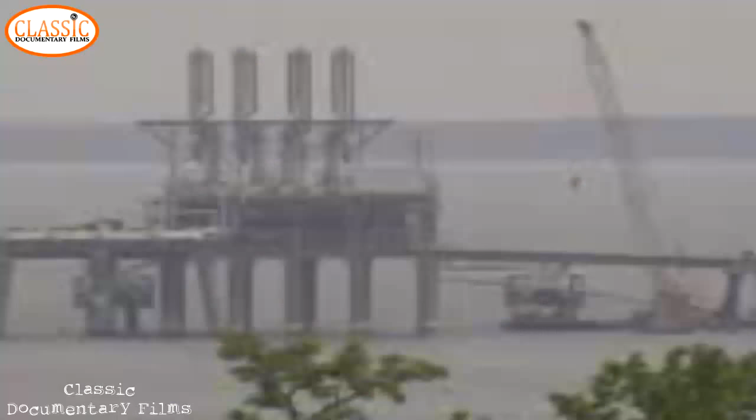Liquefied natural gas, or LNG, has become an increasingly popular energy choice for many nations. Though LNG has enjoyed a relatively safe track record, it can be an extremely dangerous commodity, capable of causing massive fires.

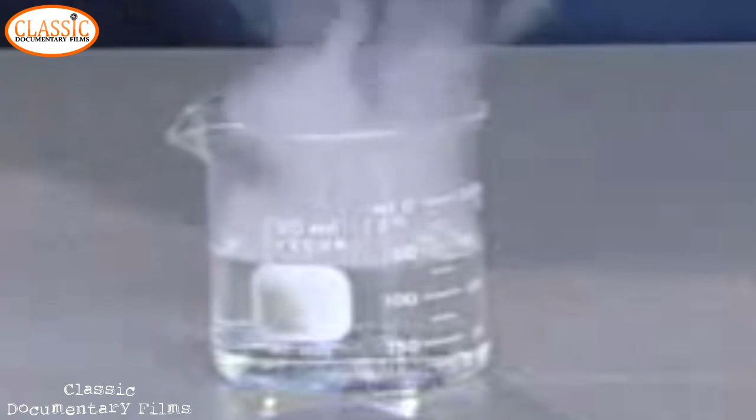LNG is natural gas in a liquid form. When natural gas is cooled to minus 259 degrees Fahrenheit, it becomes a clear, colorless, odorless liquid. By liquefying the natural gas, you reduce its volume by a factor of about 640, making it much smaller in volume and allowing you to store it much more economically. This property of LNG allows for cost-effective transport of massive quantities of natural gas.

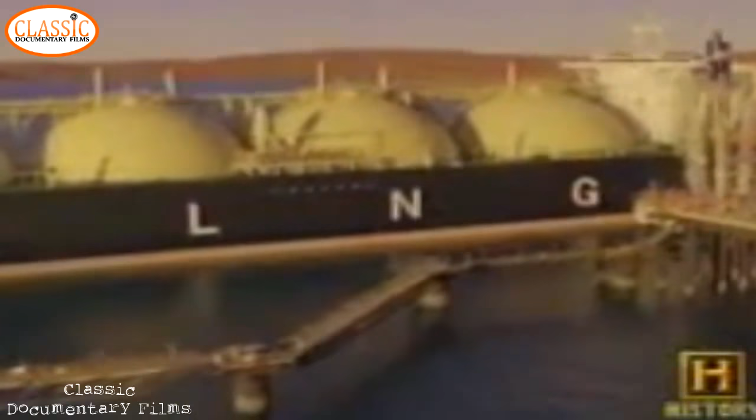Today, more than 150 LNG ocean tankers transport over 110 million metric tons of LNG annually to ports around the world. By 2010, LNG is projected to fulfill 10% of U.S. energy needs.

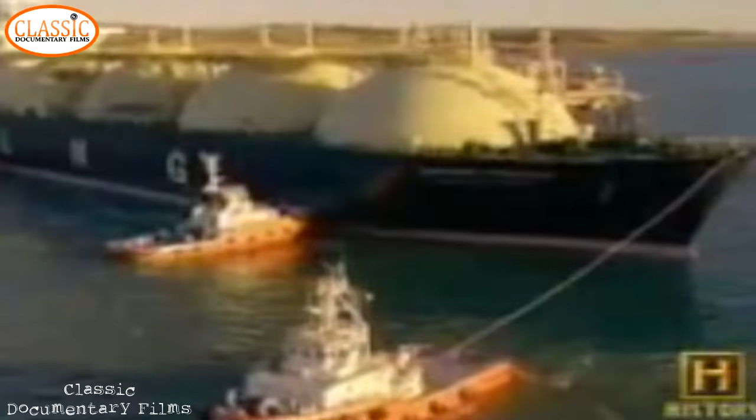There are currently 70 storage facilities called peak shaving plants in North America. They store LNG for peak demands. We also have 5 LNG import terminals and 1 export terminal in the U.S. By 2010, we probably will have 5 or 6 more import terminals.

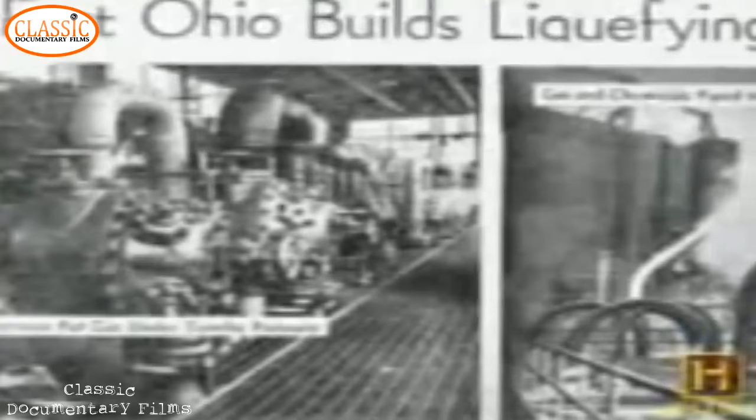The concept of liquefying natural gas dates back to the 19th century. Its practical advantages were, and still are, appealing. 60 years ago, the city of Cleveland built the first commercial LNG facility in the U.S. It was there that the full scope of LNG's deadly potential would be realized.

We're standing here on the epicenter of where the East Ohio Gas Company explosion and fire occurred in 1944, and it's indeed on this very site, on the green grass of what is now Grdina Park, where the 4 enormous liquefaction, regasification, natural gas storage tanks once stood.

On October 20th, 1944, a storage tank at the East Ohio Gas Company failed. And suddenly, at 2:41 p.m. on an otherwise unremarkable fall day, the world ended in the Norwood St. Clair area. Leaking LNG vapor ignited, and the resulting explosion and fire killed 128 people. 79 homes, 2 factories, and 217 cars were destroyed.

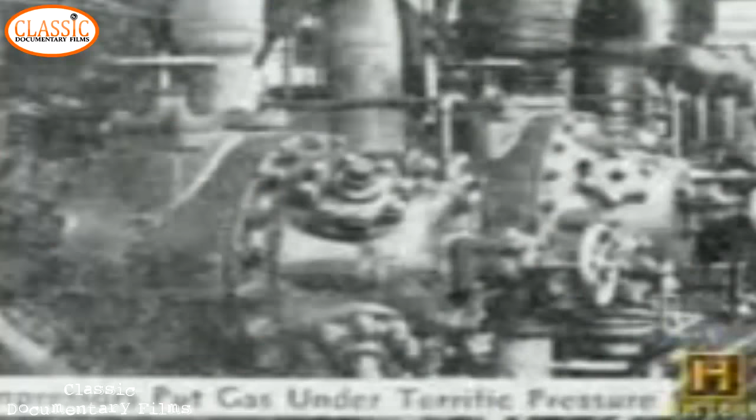The East Ohio Gas Company began building LNG facilities in 1940, as intense wartime manufacturing contributed to repeated natural gas shortages. So what they would do essentially was, when the demand was low, they would take on gaseous natural gas, liquefy it and store it, and when the demand was high, they would then regasify the liquefied natural gas and use it at that time.

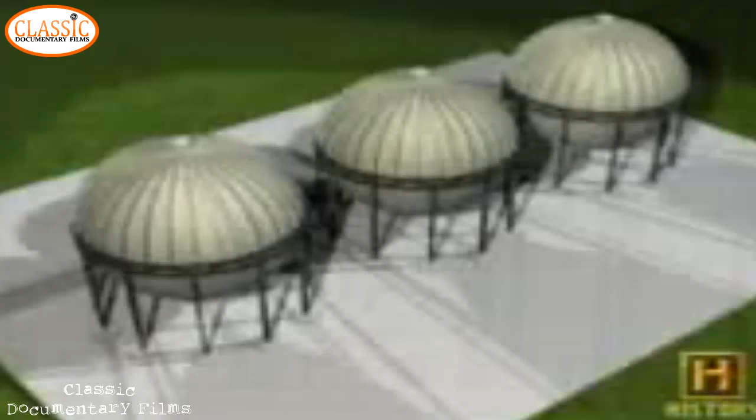3 57-foot-tall liquid natural gas tanks, each capable of storing 50 million cubic feet of LNG, were put into operation by early 1941. Those 3 tanks were of spherical construction, and the support was from vertical columns that connected up to an equatorial beam that went around those spheres.

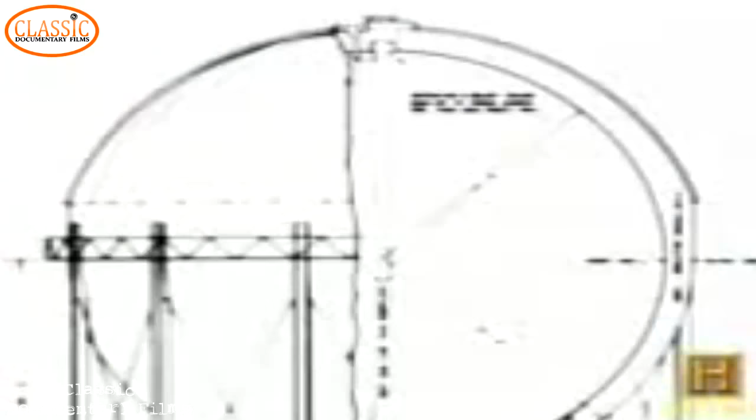That plant operated just fine with those 3 tanks for a couple of years, and the demand increased, and the plant then obtained approval to construct a 4th tank. The number 4 tank held 90 million cubic feet of LNG, double the amount of the previous tanks. It was a cylindrical shape and more stable because it was supported from the base. As with the first 3 tanks, number 4 was constructed using a 3.5% nickel steel alloy.

All of the tanks were built on East Ohio Gas property, situated adjacent to the densely populated Cleveland neighborhood called Norwood. There was no template of experience for people, I think, either at the technical level or the neighborhood level, to have any understanding of the danger that they were inviting in their neighborhood.

At about 2:30 p.m. on October 20th, 1944, several residents of Norwood noticed white, steam-like vapors creeping out from tank number 4. Leaking gas from the tank ignited, causing a massive explosion and fire. Houses 8 blocks away from the tanks instantly began to burn.

When I first saw the fire, and the only time I saw the fire, is when I was turning down, I was running down East 61st Street, turned around and looked back, and I saw this sky full of fire, full of flame, and it was like the sun had come to Earth.

The burning and the fires reached temperatures of 3,000 degrees Fahrenheit. The flames were at their peak probably 2,800 feet in the air.

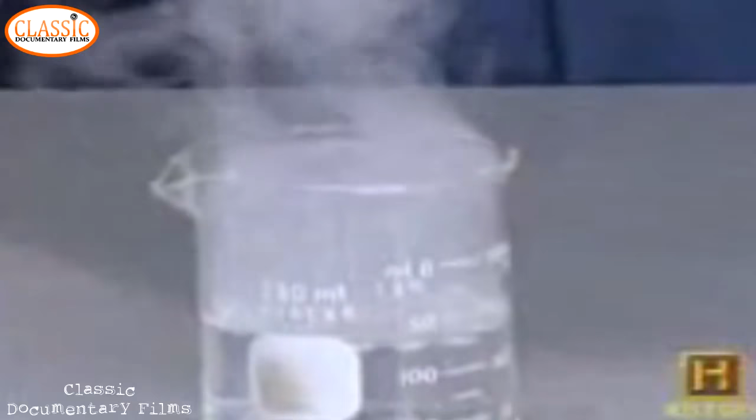If LNG leaks out of its sub-zero container, it will not immediately dissipate. In its liquid form, natural gas is heavier than air, and it will stay close to the ground. The LNG can linger for up to 30 minutes before warming enough to evaporate, ample time for an ignition source to spark an explosion.

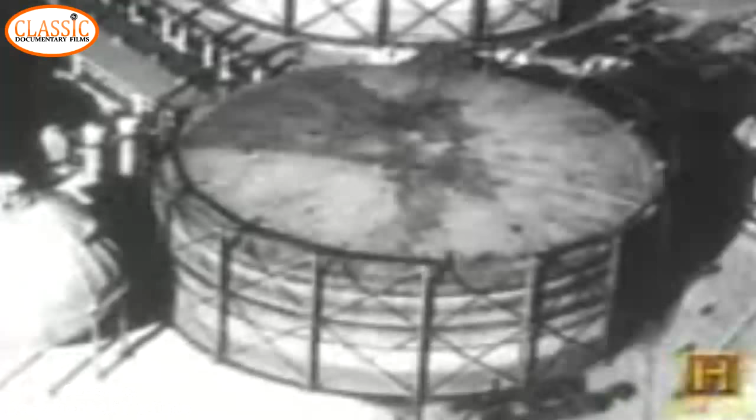The tank in Cleveland contained 90 million cubic feet of LNG, which spread as an invisible vapor cloud into the street and sewer system. Essentially, the neighborhood just before the first initial explosion occurred is best thought of as a sort of a saturated wick. Pilot lights ignited the cloud once it was inside, and houses burned from the inside out.

Firefighters were helpless as the water supply system was decimated by multiple explosions. The fire continued to smolder for three days after the explosion. The spread of the fire was attributed to several causes, but one fatal flaw was to blame for the initial leak in tank number 4.

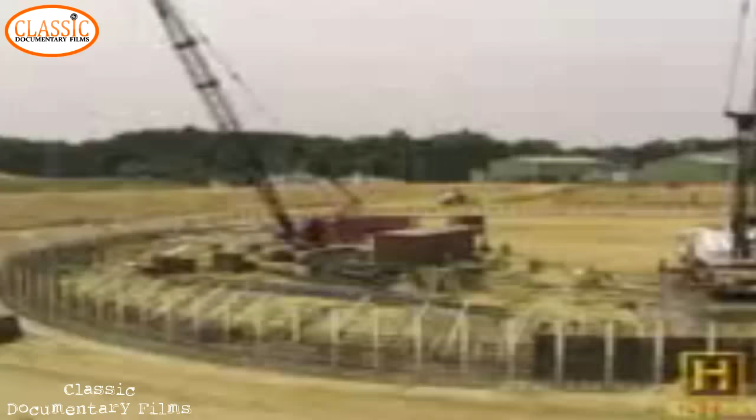The properties of 3.5% nickel steel alloys, when subjected to sub-freezing temperatures, were not thoroughly understood. It was later learned that a higher concentration of nickel was needed to ensure steel's integrity in sub-freezing conditions. The steel alloy lining of tank number 4 was weakened by the cold temperatures of the LNG, which allowed a crack to form. There was a small leak, and the crack propagated, the leak got large, and it dumped the entire tank. Today, LNG tanks are made with either stainless steel or a steel alloy with 9% nickel, both of which maintain their strength at freezing temperatures.

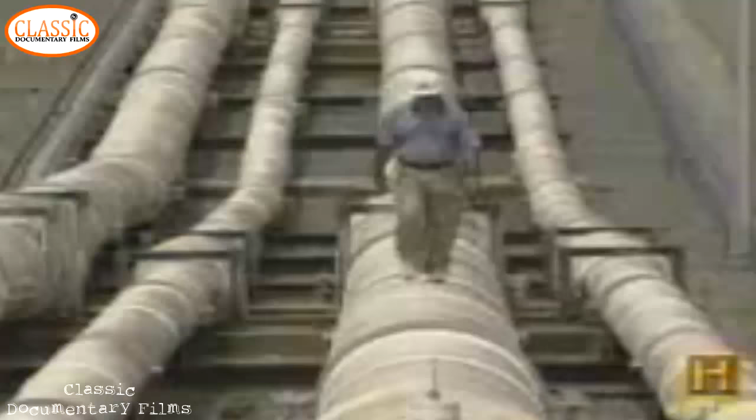Other fundamental improvements have also become standard procedure in modern LNG facilities. One of the major changes since Cleveland is that facilities are very well instrumented for any hazards. This is for vapor, any escaped vapor, any fires, the flame detectors, such that you can detect immediately any hazard. This is part of the philosophy of trying to anticipate any troubles as soon as possible before they happen.

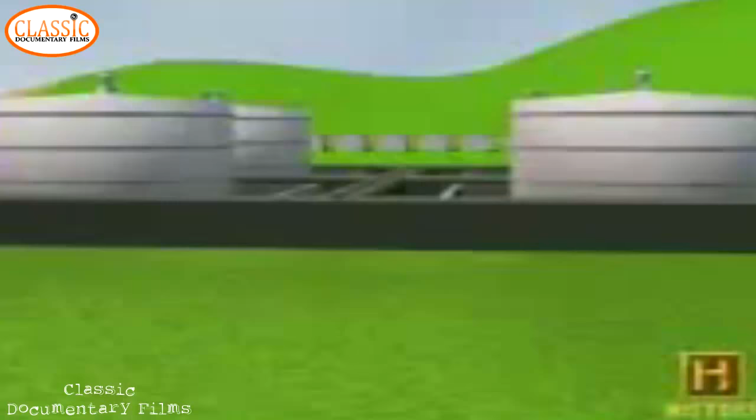Since the Cleveland tragedy, LNG tanks are surrounded by berms and dikes, which can contain the entire contents of a tank. Additionally, an exclusion zone is determined for each facility, keeping populated areas at a safe distance, even in the event of an accident.

LNG is touted as a safe energy source, but in early 2004, an explosion at an export facility in Skikda, Algeria, killed 27 people. There's no question that an accident of the magnitude of the Skikda accident raises questions associated with the safety of LNG, but it is premature to read into that, in my opinion, given that we just don't know what occurred.

Opponents to proposed LNG import terminals fear that terrorists targeting an LNG tanker in port could turn the vast stores of supercooled gas into a mile-wide ignitable vapor cloud. Recently there has been concern about intentional damage to a facility. Any feasible attack would have results that are less than the maximum credible accident that the facility and exclusion zones are already designed for.

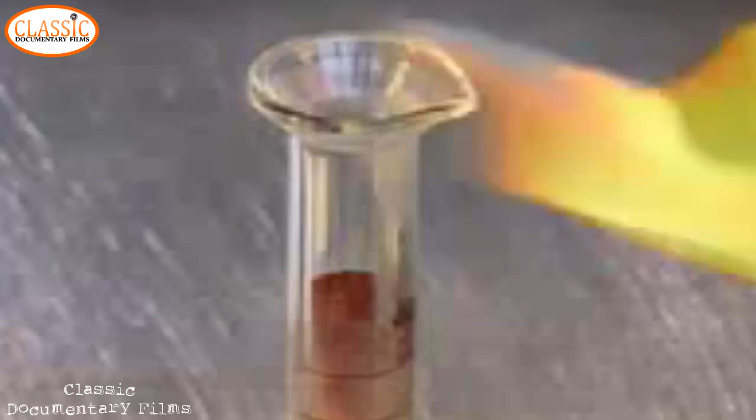Offshore import terminals are being developed as an alternative to minimize the risk of potential damage, since they would be several miles from land. The Cleveland disaster provided the foundation for the safe handling of liquefied natural gas. But despite safety measures and technological improvements, the growing number of LNG facilities will continue to create opportunities for another disaster.

Kansas City, July 17, 1981. Close to 1,500 people gathered at the newly built Hyatt Hotel for a dance competition. The hotel was less than a year old and featured innovative architectural designs. At 7:05 p.m., as some danced and others looked down on the festive atmosphere from skywalks, the fourth floor, 60-ton walkway gave way.

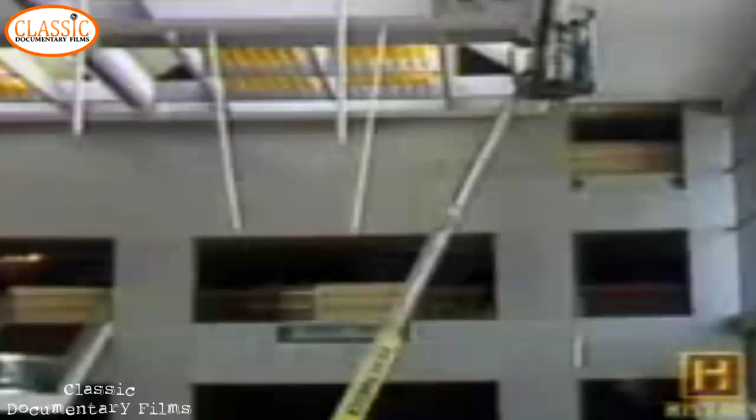It landed on the second floor skywalk below, and both walkways fell to the lobby floor. 114 people were killed. This was the single largest structural disaster in terms of loss of life in U.S. history. The investigation following the disaster would reveal an accumulation of project management errors, which ultimately allowed for a simple yet deadly flaw to be installed in the support system of the overhead walkways.

The Kansas City Hyatt was a stunning example of current architectural innovation when it first opened its doors in July of 1980. The Hyatt Hotel in downtown Kansas City was commissioned to be an architecturally interesting and imposing structure. The lobby, when you walked in, was four stories high. One of the signature features about the Hyatt Hotel in Kansas City was the fact that they had a set of suspended walkways. They were there to capture the attention of visitors that walked in because they looked like they were virtually suspended in air.

But few realized that the hotel had a problematic history. This hotel was envisioned as a large part of the downtown redevelopment and was commissioned on a fast track. Get it up. The hotel then went through a fast track in which we built this whole hotel between 1978 and 1980. We built a huge hotel which consists of an underground parking garage and including the tower in a period of 2.5 to 2.75 years.

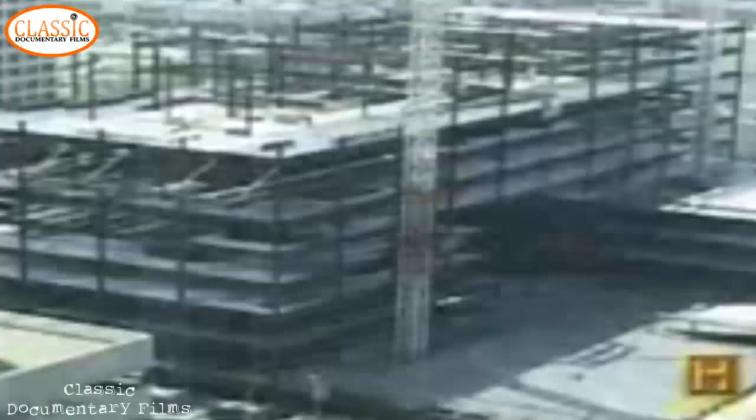The fast-track method, which is still used today, entails continuing to design components of a structure as others are already being built. The expedited construction of the Hyatt was further complicated by staffing problems. In 1979, construction of the hotel is going apace, but certain management and personnel problems show up. Somehow, because of the problems of fast track, because of the changes on the design team, the designer, the design engineer, the engineer of record, and the chief detailer resigned somewhere in the middle of the project.

This project was transferred to somebody else. During these personnel shifts, a minor design change in the connections supporting the atrium walkways was overlooked.

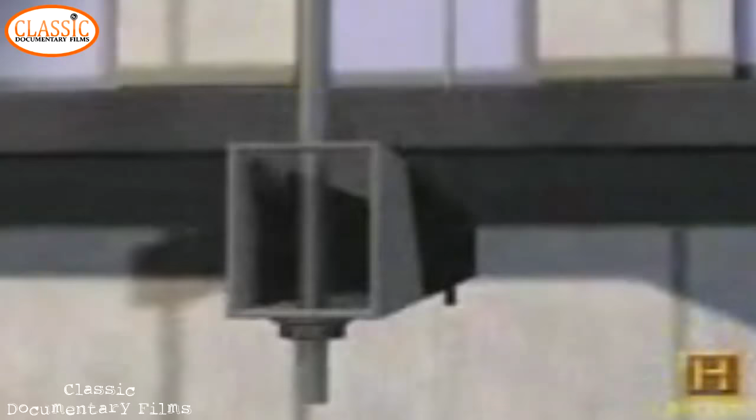In the original blueprints, a single metal rod ran through a hollow steel beam called a box beam. The rod carried the weight of each walkway to a roof truss. The original box beam construction was supposed to be a continuous rod, one rod that went through the 4th floor and picked up the 2nd floor independently.

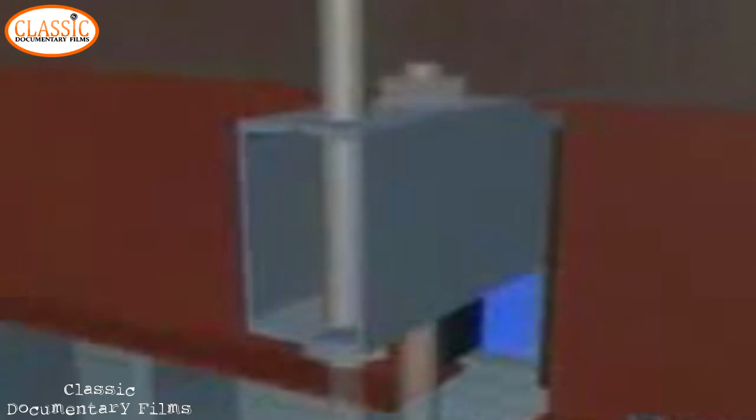The design was difficult to build, so the steel fabricator made a request to replace the single rod with 2 separate rods, thereby creating new connection points in the 4th floor beams. This modification left the 2nd floor walkway hanging from the 4th floor instead of the ceiling, doubling the load on the 4th floor box beam connections.

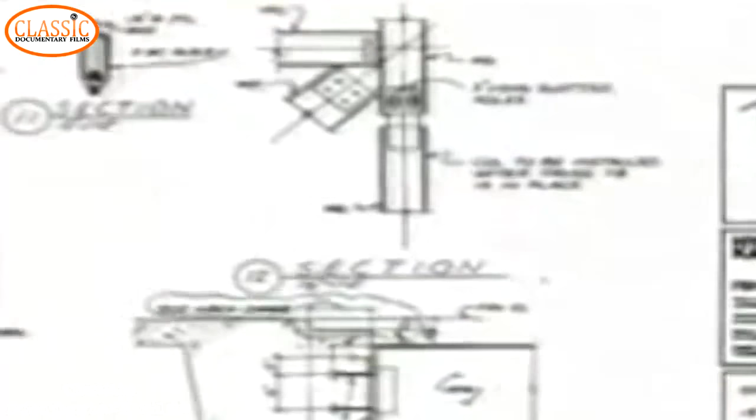The new walkway design needed to be drawn in detail, and new weight calculations needed to be included. Several levels of project managers approved the new bridge design, with the simple yet crucial load calculations missing.

It wasn't that this connection was misdesigned. This connection was never designed. That was the problem. It was detailed, but in changes and movements of the detail between the different parties, it never got engineered. And as it became part of various detailed plans, people kept assuming that the design had been checked at some point in the process.

Hyatt engineer Jack Gillum gave the undesigned connections the final seal of approval, and they were installed.

There was an opportunity to catch the flawed design in October of 1979, when during construction, a section of the atrium roof collapsed. Construction was halted, and the building was inspected.

We checked all of the connections to the roof, but we did not check anything any further at that time. We did not look at the bridges whatsoever. So literally, the whole lobby, all of the design details were checked. Even the rods suspending the walkways were looked at, and no one thought to go to where the walkways connected together and down to each other and say, what's that connection and how is it designed?

But unfortunately and literally, the check stopped one connection too short. In November, construction began again, and the hotel opened the following summer.

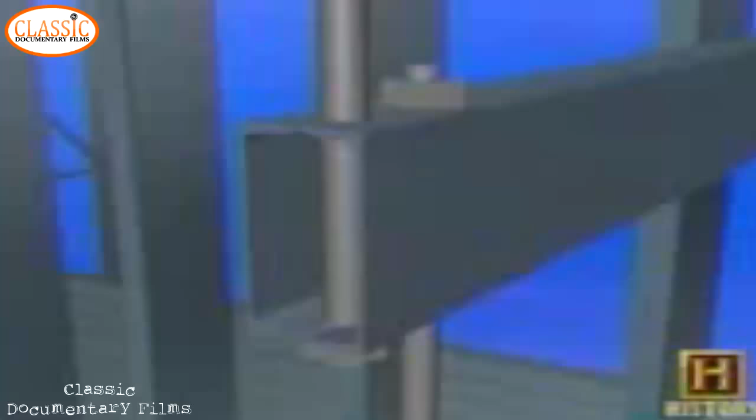Over the next year, the steel box beam connections slowly deformed. On the evening of July 17th, a weekly dance competition was being covered by local news crews.

Reporter Michael Mahoney was reaching for a videotape when disaster struck. I was reaching down, sort of looking at the floor, and heard these really sharp metallic pop, pop, like that. The walkway on the second floor began to sag and then finally broke apart.

There were people trapped underneath these huge blocks of concrete. There were people that had been speared by the broken glass from the side rails of the walkways.

Investigators who were on the scene within hours after the collapse discovered glaring clues as to what had happened. When I get there, there's just 6 rods hanging silently from the ceiling where the walkways have pulled off and collapsed. By the first morning, we all knew what had happened.

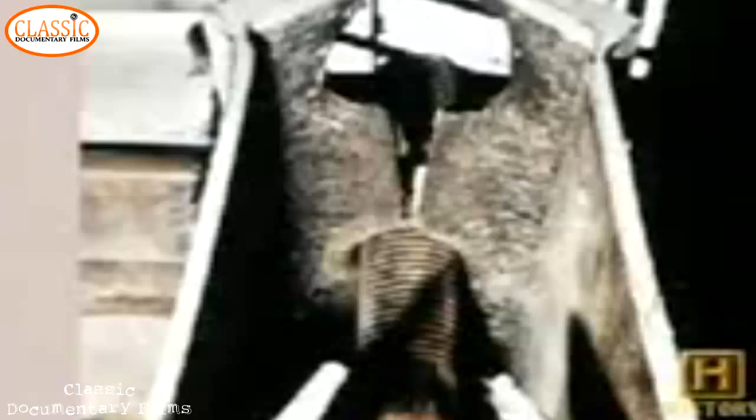There was no question. And there are some classic photographs that we and others have taken of the joint where the 2 lips are bent through and they're perfectly straight.

Analysis of the debris enabled forensic engineers to reenact the chain of events, giving them a clear picture of how the overstressed box beam connections failed.

Literally, you had a situation where the rod was pulling up at the bottom of the C, and this bottom set of lips was the whole load-bearing structure for the 2 sections. Well, of course, what happened in the disaster is the rod pulls right through.

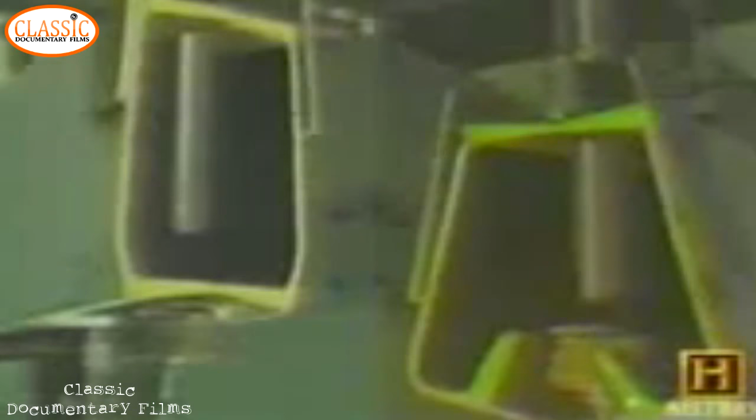The National Bureau of Standards report indicated that the box beam connection failure was inevitable. The design should have considered a larger nut, or even better and simpler, consider a plate with a hole that would be like a distribution plate or spacer that would be put there.

That plate probably would cost something outrageous like 40 cents, maybe $1 with the hole. That would have prevented this failure.

The Hyatt tragedy was as much about process as it was physics. Most importantly, what the investigation revealed is that the process by which we design and build structures needs to be more rigorous. It has to be over-designed by a factor of 20, I think, in part to ensure that there's confidence that those walkways will never come down again.

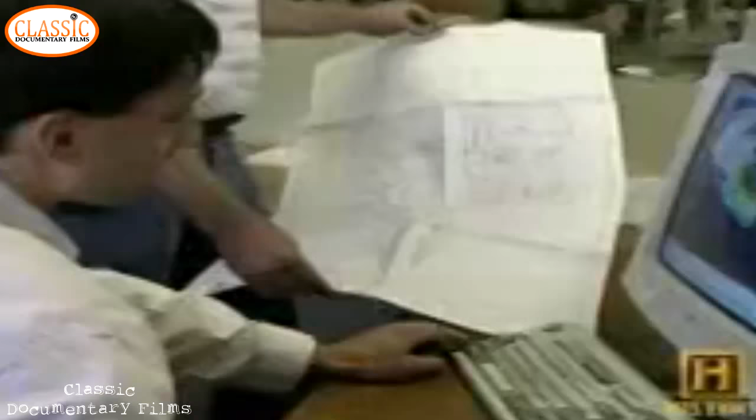The collapse was a wake-up call to engineers. As a result of this disaster, the codes that govern the structural design of buildings of this type were actually changed. There was a very explicit articulation in the subsequent revision of the codes of where the responsibility for this engineering analysis lies, thereby hopefully ensuring that you'll never have a situation again where someone assumes someone else is doing it because it's not clear in their minds just who's really got the responsibility to do it.

The 114 lives lost in the Hyatt Skywalk collapse serve as a lasting reminder to engineers that the smallest of errors can lead to the largest of tragedies.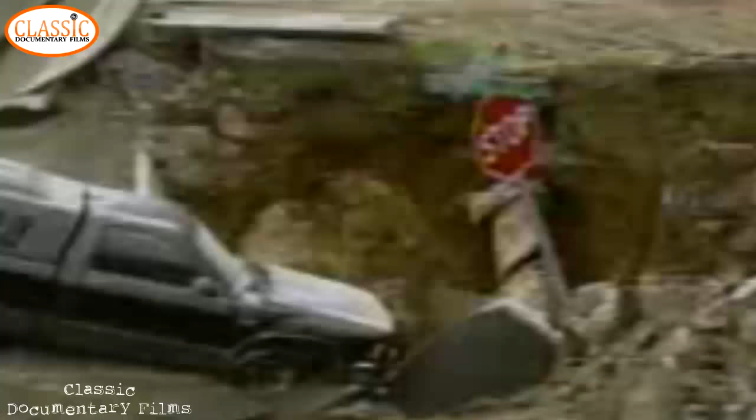Naturally occurring sinkholes surface every day in several regions of the United States, particularly Florida, sometimes wreaking havoc in populated areas. Many urban areas, though, are plagued by another kind of sinkhole: those formed by the breakdown of man-made infrastructure hidden under a bustling city.

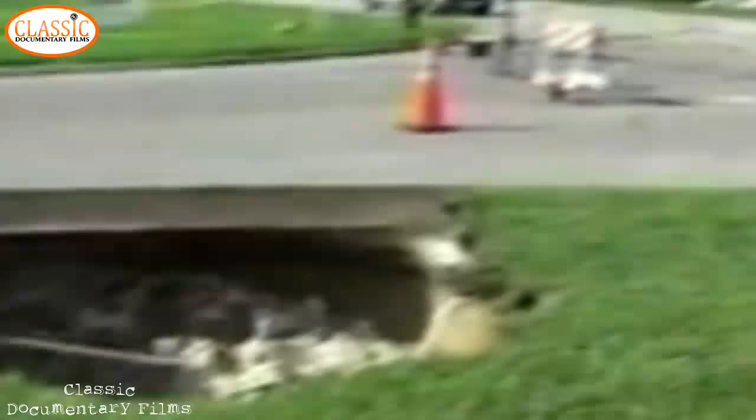A common culprit is the collapse of a deteriorating sewer pipe. As far as sewer collapses, they're of course not a natural phenomenon, they're because of a man-made condition. But you have the similarity between those and the natural phenomenon because you have water that's basically carrying away soils.

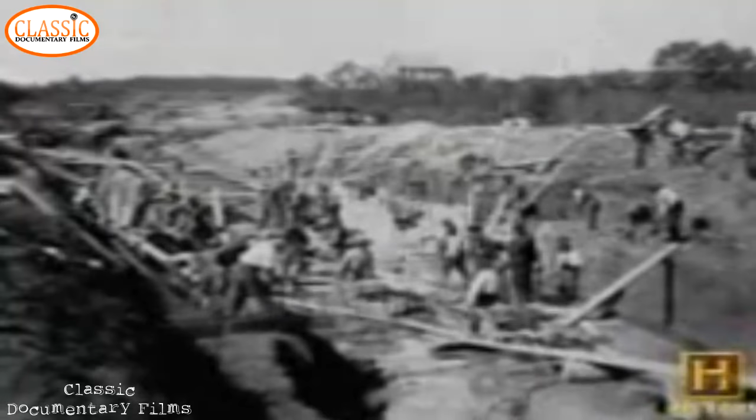During the early 1900s, rapidly expanding cities around the country began building networks of sewer tunnels. Close to a century later, many of these aging tunnel-like pipes have begun to fail, sometimes with deadly consequences. The potential for this kind of thing can happen anywhere, and a lot of it just depends on how old these lines are and what may have been placed on top of them, because the original designs probably never anticipated some of the conditions that they're exposed to now.

On December 11, 1995, residents of an oceanside community in San Francisco witnessed just how catastrophic a sewer collapse could be. There's a geyser of water coming out on a fancy street in San Francisco, and there's a tide of sewage flowing down past people's lawns.

And this went on for 45 minutes until finally the sewer collapsed. It broke. It's like you've just got a machete and you chop through the garden hose, and at that point the water just goes glug, glug, glug. Neighbors watched helplessly as a multi-million-dollar home slid into a massive sinkhole.

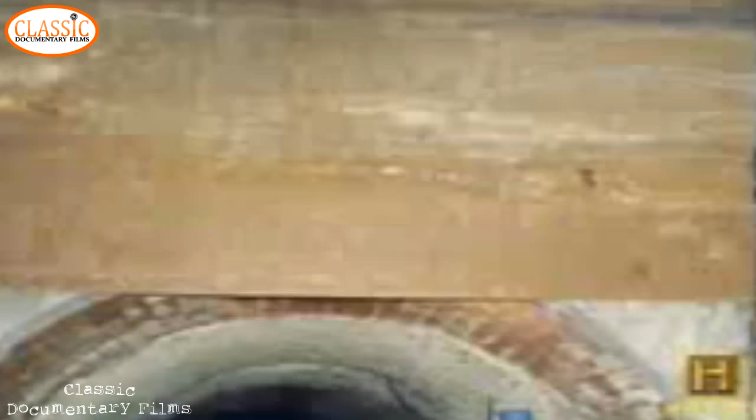The sinkhole also damaged several nearby homes. The flow of heavy rains from the previous night was obstructed by a gate in the sewer line. The gate was being used to temporarily block sewage flow during construction on pipes downstream. It was concluded that this gate had been left in a partly lowered position.

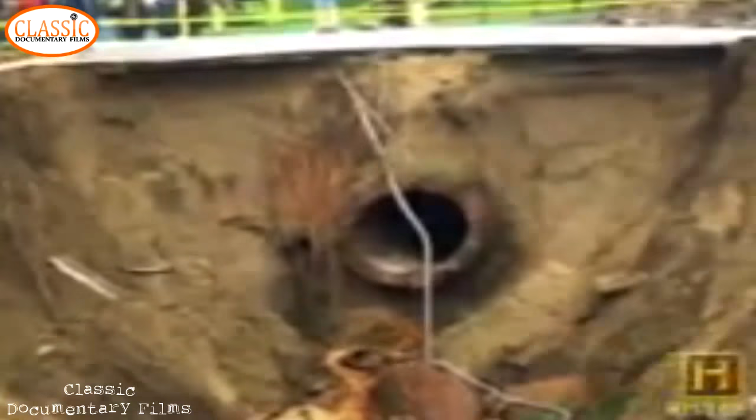So it's a bit like if you have a garden hose and the water's just flowing through it, and you put your foot on the garden hose, squeeze down on it, you pressurize the garden hose. This gate created a pressure, and the pressure was felt all the way up, 1,500 feet up. The pressurized water needed another way out. Nearby sewer construction created a small sinkhole above the sewer line. It grew during each rainfall, creating a weak point over the tunnel, and provided an ideal location for the water to break through.

The San Francisco sinkhole didn't injure anyone, but a sinkhole in Atlanta destroyed more than property. In the early morning hours of June 14, 1993, just as a severe rainstorm was tapering off, two employees of the Marriott Courtyard Hotel in Atlanta, Georgia, were meeting in the hotel parking lot.

Suddenly, the ground beneath them began to cave in. Within seconds, they were swept into a massive and watery chasm. They were innocent victims of a sewer collapse that resulted in an 80-foot deep by 100-foot wide sinkhole. Ensuing investigations delved into the 100-year history of the site and into the installation of a safety device whose very presence contributed to the sudden sinkhole formation.

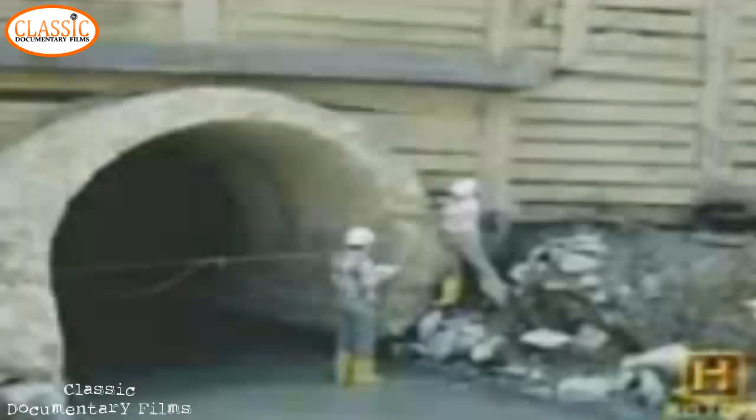The sewer that collapsed, the Orme Street trunk sewer, was constructed in the early 1900s. It was an unreinforced concrete arch, and it was cutting edge for that particular time because prior to that, most of the sewers had been constructed of brick.

Like many other sewer lines of the day, the Orme Street trunk was built above ground, simply a tube resting in a creek bed that utilized the natural slope of the stream. But during the 1960s, the tunnel was buried with fill from nearby freeway construction.

Warehouses were then built over it. The condition that the improvements resulted in on that particular site raised that elevation to approximately 30 to 42 feet above the invert of the sewer. So it added a lot more weight above that structure than existed over it at any point during this previous history.

In 1971, on the same site as the future Marriott parking lot, a 98-foot wide sinkhole formed under a warehouse. The site was investigated, opened up, reconstructed, repaired, and no life was lost.

In 1989, a hotel developer bought the neighboring lot. It was decided that the sewer line could support the hotel's surface parking lot. The design team, however, was concerned enough about the poor condition of the sewer that it researched safety devices for the site.

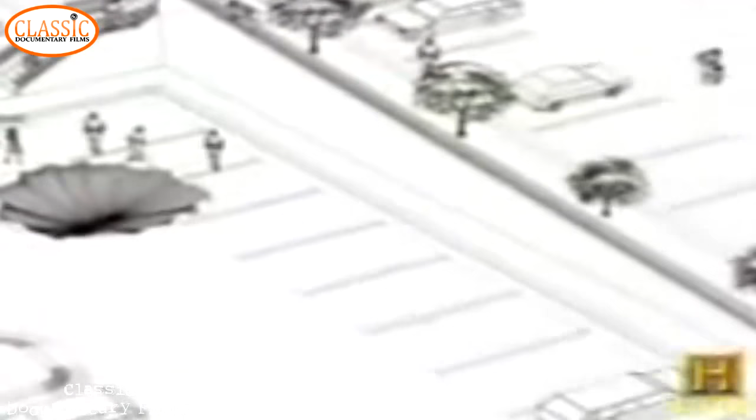A specialty contractor proposed a cost-effective and novel solution: burying an enormous geogrid, or safety net, between the parking lot and the sewer. The geogrid would alert people to a sinkhole by gradually sagging over an anticipated 20-foot wide void, suspending the parking lot for 100 hours, ample time to evacuate the area. But the ensuing sinkhole would overwhelm their estimates.

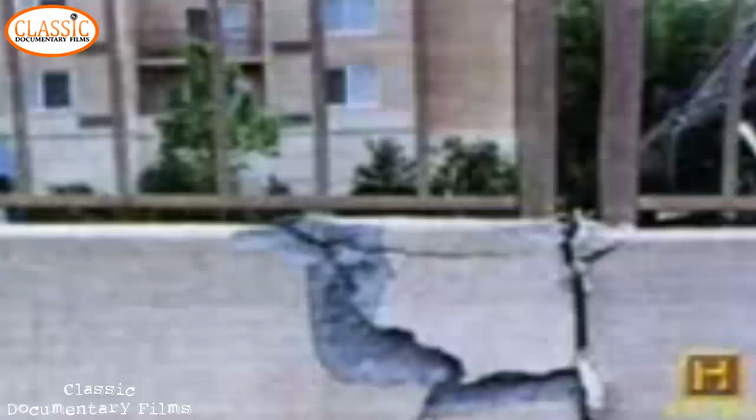Several days before the 1993 collapse, city workers inspected the sewer after reports of cracks in the hotel parking lot. At that point, one of the city inspectors actually walked part of the line, and they noticed that the invert upstream of the manhole, going toward the 1971 collapse zone, actually was heaved up.

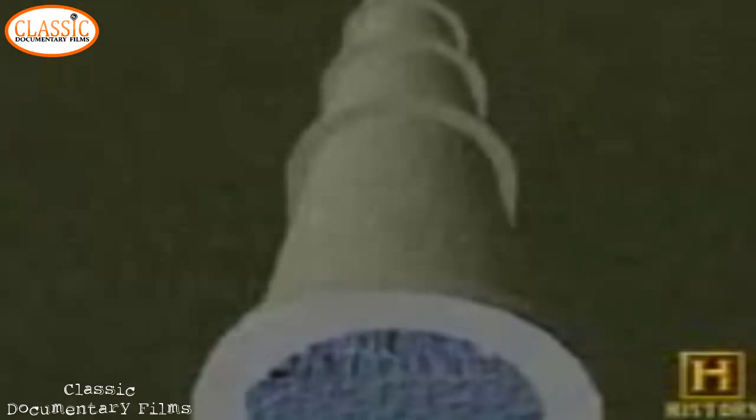Two days later, before scheduled sewer repairs could be done, Atlanta was hit with a severe rainstorm. Cracks in the sewer walls allowed water to run outside of the sewer. The soil in the area was actually very silty, so it had a lot of very fine particles in it, and they're very susceptible to erosion.

So if there is exfiltration or infiltration, those fine particles get picked up and then get reintroduced into the sewer and basically create these voids. What happened that day was that the sewer was carrying away a lot of the fines, so the side walls could have collapsed at that point. So much of the supporting soil was washed away that the sewer gave way.

The catastrophic sewer collapse resulted in a sinkhole that was 100 feet wide, 5 times the estimated 20-foot diameter. The geogrid supported the parking lot for 5 hours, but in doing so, concealed typical sinkhole warning signs. The early signs of distress were displaced away from the center of what would later become the hole, toward the edges. The geogrid was pulling at anchor points, creating multiple small depressions instead of one larger and more obvious one.

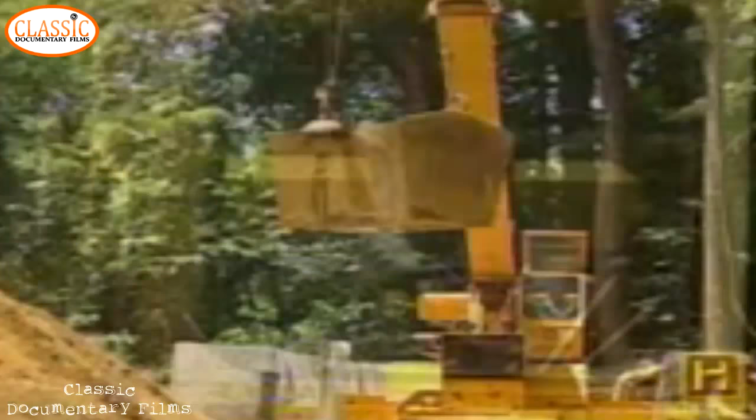Since the collapse, the sewer was replaced by new reinforced concrete pipe.

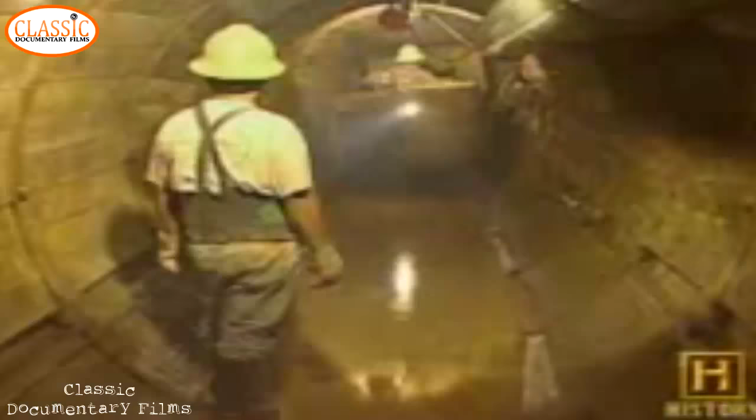These recent sewer collapses have been a warning to cities around the country that still depend on century-old sewers. Replacing sewer lines is costly, so strengthening existing pipes is a more practical solution.

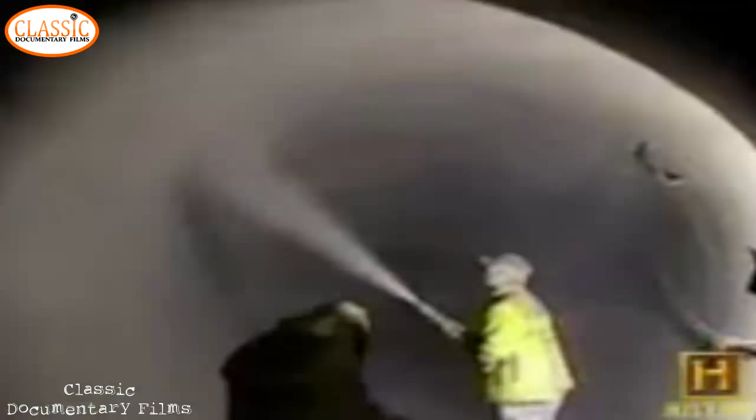We've probably spent approximately $50 million in making improvements to just the combined sewers, and we've done that using a rehabilitation process called gunite. Gunite is simply a concrete that can be sprayed onto the wall of the existing pipe.

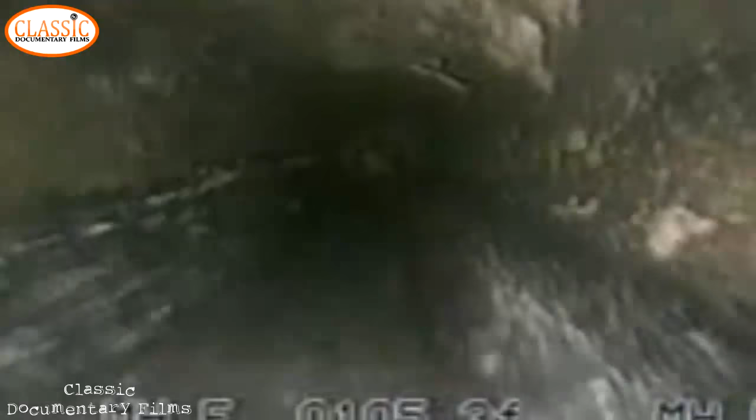The gunite strengthens sewer walls, but new technologies, including remote-controlled cameras which detect leaks and voids in and around sewers, are aiding cities in the effort to catch failing sewers before they collapse and cause disaster.

In 2004, a century-old levee in Northern California broke and flooded more than 12,000 acres of crops, causing an estimated $93.7 million in damages. Certainly a disaster, yet it couldn't compare to the devastation and staggering loss of life that

China's Yangtze River Delta experienced in 1931, when a system of levees also failed to hold back rushing waters. It burst through levees with the wall of water about 22 feet high and caused 3.7 million deaths. It was the largest flood on record.

It's the one that caused the most damage. The Yangtze River Basin is very large. The Yangtze River is about 6,300 kilometers long, and the basin has very unique characteristics, being very high from the upstream region.

The original source of the Yangtze River is from the Tibet-Qinghai Plateau, which has elevations of 3,500 to 5,000 meters, then rushes down to the middle ridge about 2,000 to 500 meters high, and then to the flatter area downstream, emptying into the sea at Shanghai.

Due to the powerful flow of the river, called the Dragon by the Chinese, great floods historically raged through this area about every 10 years.

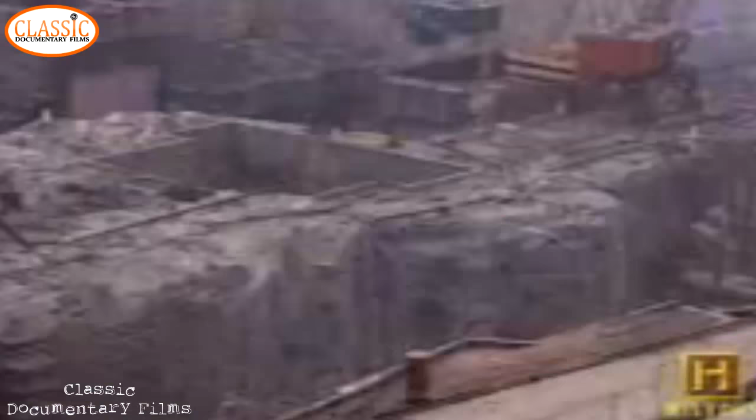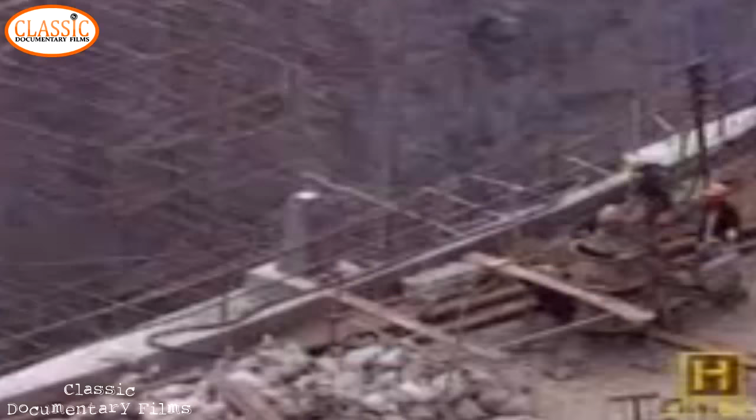The Three Gorges Dam has so much flood carrying capacity, about 21 billion cubic meters. For example, if the 1931 flood happens again, most of the flood can be contained by the Three Gorges project reservoir, and that will reduce the damage tremendously.

Some disagree. The Three Gorges Dam will provide some flood protection in the lower reaches, but it's not going to stop all the floods. Any storms that occur downstream of the dam, which is a very large area, contain huge populations. This area is susceptible to floods, and there's no dams to protect that.

The impact of the Three Gorges Dam on flooding is very ambiguous. It's a double-edged sword in the sense that the dam will also trap the sediments, the silt. It will increase the level of the riverbed, and so it will increase the flooding risks for the population upstream.

Perhaps the Three Gorges Dam and other flood walls will be able to harness the Yangtze's fury. But the Great Flood of 1931 taught a lesson through death and misery. The dragon is not easily tamed.

Asbestos is the disaster of the century that took a century to uncover. It claims 10,000 American lives each year and thousands more worldwide. I can think of no substance in the American workplace that has caused more disease and death than the use of asbestos.

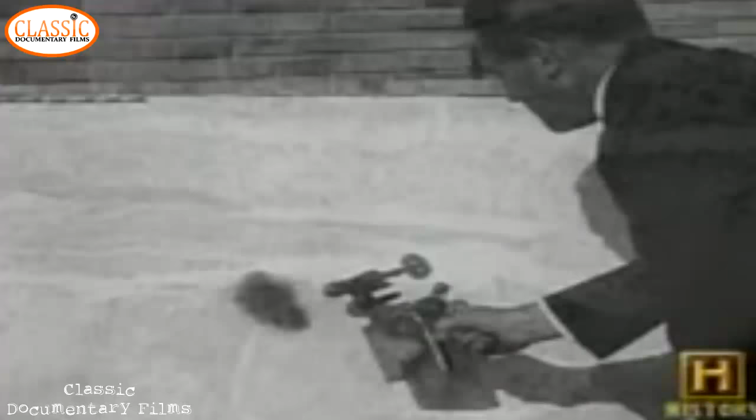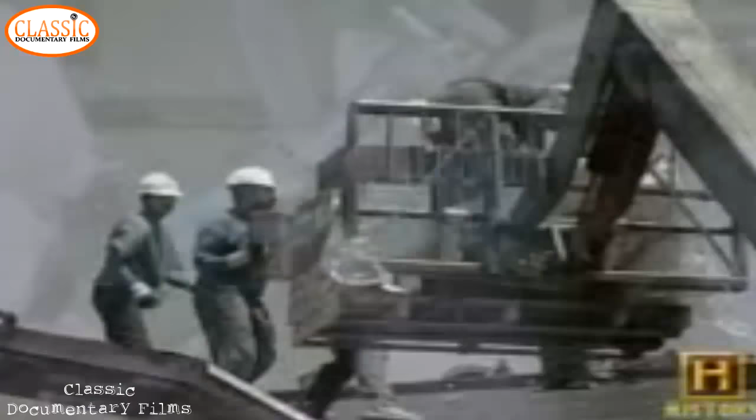Once touted as the miracle mineral, asbestos in Greek means inextinguishable or incombustible. The mineral's fire-retardant qualities are among its most valuable characteristics. But asbestos is also dangerous. It lurks silently in our walls, pipes, roof shingles, tiles, brake pads, and in the air we breathe.

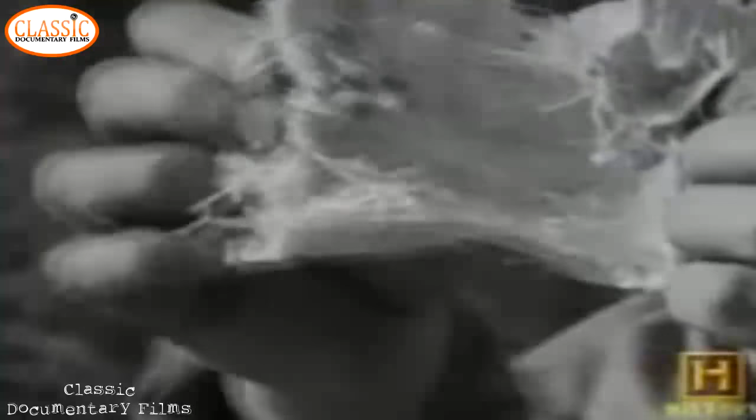Asbestos was first mined commercially in Quebec, Canada in the late 1800s. The rock-like mineral separates easily into very small airborne fibers. It is this aerodynamic substance that becomes harmful when inhaled.

These fibers can break down and get into the respiratory tract. If you don't breathe the fibers in, they're not really a danger, but those that you can breathe in come into the lung, and because they're mineral, they're virtually indestructible. So they continue in the lung to cause scarring of the lung and eventually lead to a breathing problem that we now call asbestosis.

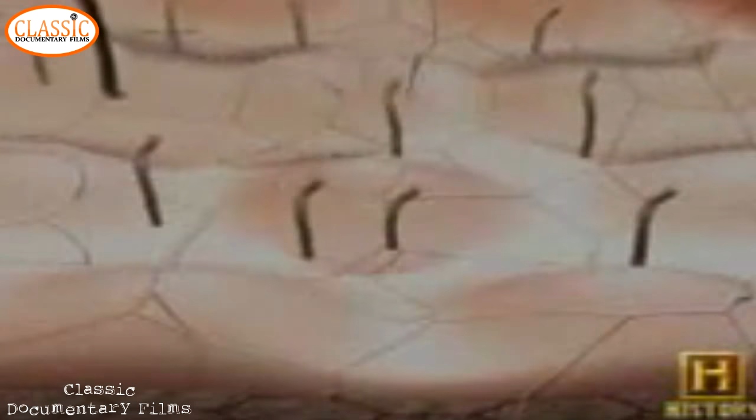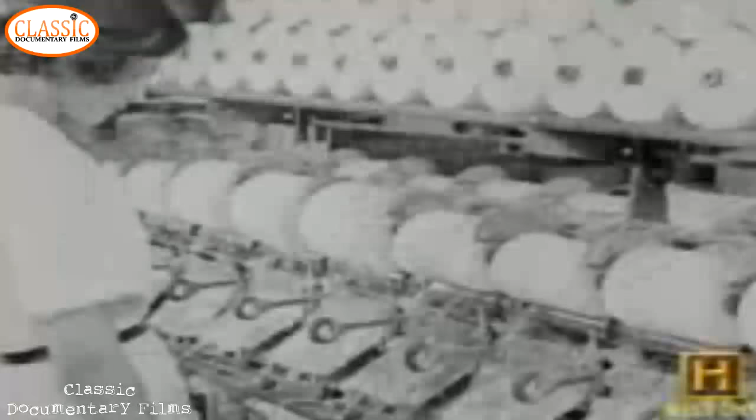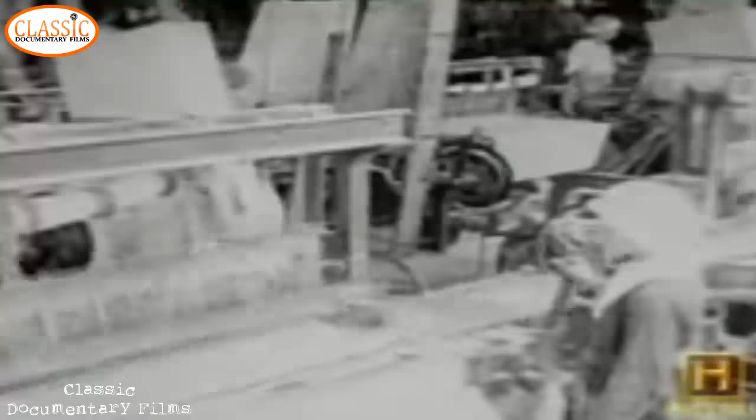In 1924, results from an autopsy performed on a 33-year-old woman who worked in an asbestos textile factory for 20 years presented the first clear case of death due to asbestosis. Then in 1930, the British epidemiological study of textile mill workers showed a much higher prevalence of death and disease from asbestosis in people that manufactured textile products.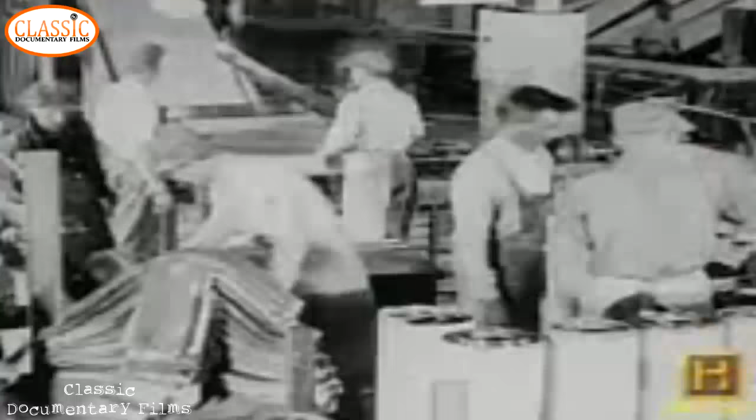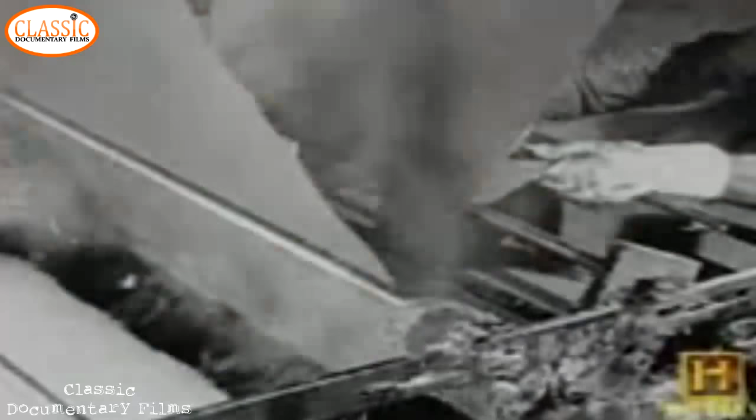Despite this and similar reports, the asbestos industry in the U.S. continued to mine, manufacture, and use asbestos in over 3,000 consumer products. The more knowledge that was published in the medical literature about asbestos causing first asbestosis, then lung cancer, then mesothelioma, then other cancers such as gastrointestinal cancers, the more asbestos was being produced and sold to the American public. The industry had long known that asbestos was dangerous, yet it continued to use it without protecting or warning its employees and consumers.

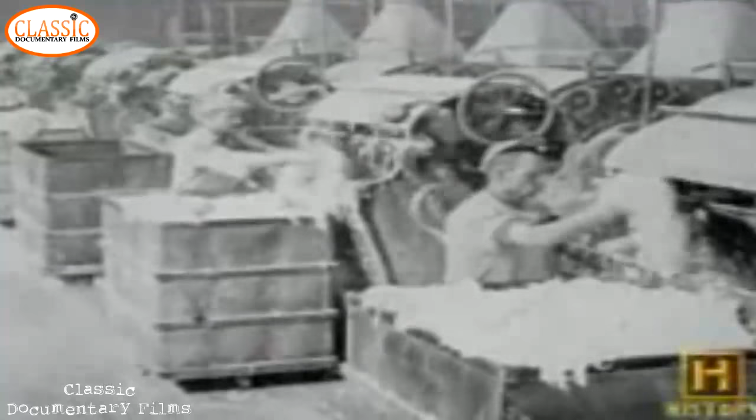Insurance companies knew that asbestos was a risk very early on. In fact, in 1918, an insurance company representative named Hoffman wrote that insurance companies were reluctant to insure people who mined asbestos. They didn't know how to describe asbestosis, they didn't use the term, but they knew that workers in this trade died early, died rapidly, and died much more often than workers in other industries.

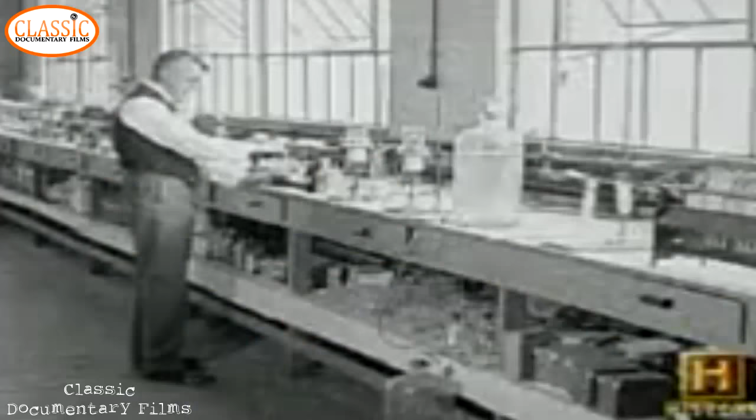The asbestos industry was aware of this. During the 1930s, it's very clear that the asbestos industry were actually sponsoring research into asbestos and asbestos-related disease. There are notes and letters in the literature saying, this is what we're finding, and when cancer came about as a suspicion, let's not mention cancer.

Unfortunately, it took decades and thousands of deaths before the industry's dirty little secret was revealed. But fortunately for future victims and their families, the asbestos industry left a paper trail long enough to hang itself. So there is just a vast amount of evidence out there that employers knew about asbestos hazards.

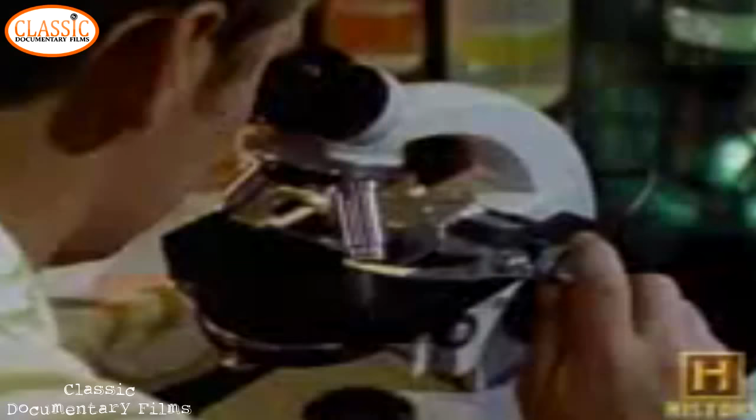Officials of the asbestos companies knew in the 1940s and 1950s that asbestos could cause cancer, and in the 1960s they were very well aware that asbestos exposure could cause mesothelioma. But it wasn't until the late 1960s or early 1970s that these companies ever placed warning labels on their products.

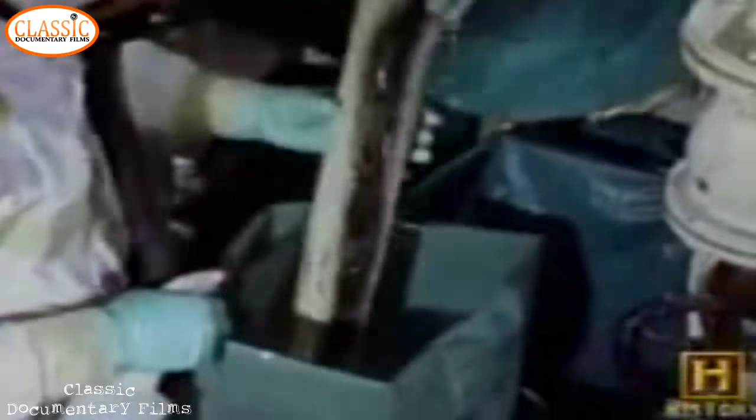Finally, in 1972, when the Occupational Safety and Health Administration was established, the first substance it regulated was asbestos. It became virtually impossible for any employer to use asbestos in the workplace to an extent where there was visible dust, which meant that pipe coverings containing asbestos cements, and all of the various dusty products asbestos was used in, ceased to be commercially viable anymore.

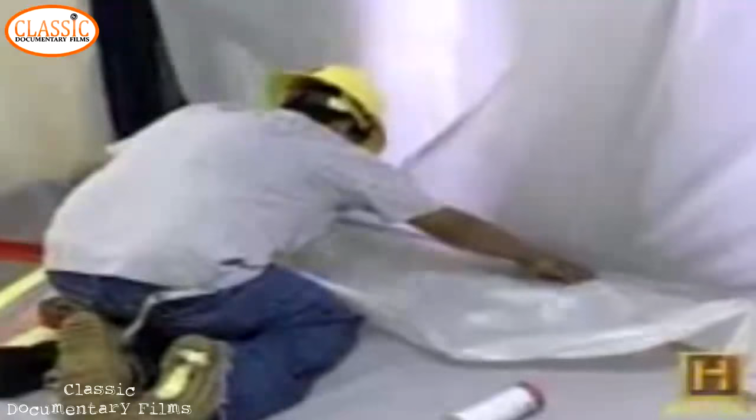By the early 1980s, companies like Brickley Environmental in San Bernardino, California, have worked on the remediation of asbestos in schools, office buildings, banks, airports, and other commercial use facilities.

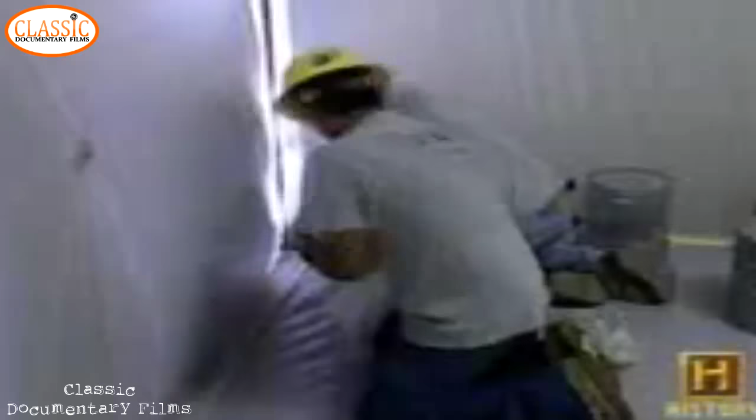The material that we're actually going to be removing today is the acoustical ceiling texture above us. This material contains asbestos. The process for removal will be to get the containment set up, negative pressure installed, which you can see down at the end of the hallway there.

The negative pressure system sucks air out of the work area through a series of filters and discharges that air outside, creating a negative pressure in the work area, which ensures that asbestos fibers cannot escape the containment.

Once that negative pressure is established, the containment is set up, decon is set up, the crew will suit up, put on respirators, come in, wet this material down, and manually begin scraping it. As they scrape the material, they'll package it, bag it, and process it for final disposal.

Despite the efforts to reduce the amount of asbestos manufactured and used in the United States, the asbestos crisis is far from over. Asbestos products continue to be sold today. Many people think that asbestos has been banned, but in fact, there is no ban of asbestos products. As long as asbestos remains in the air we breathe, asbestos cases will remain in the courts.

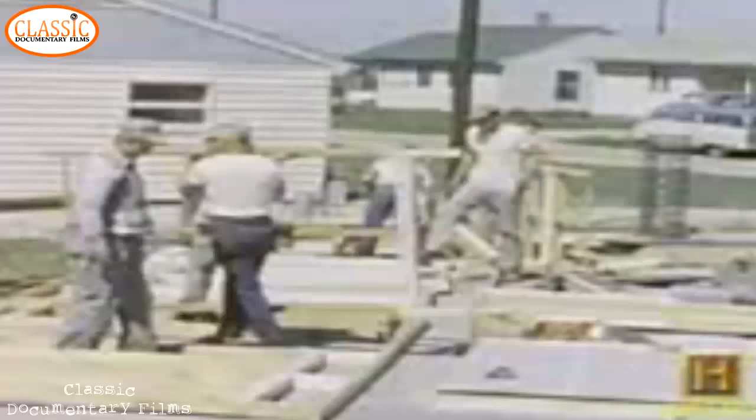And because of the numbers of people who have been injured by the inhalation of asbestos, we have hundreds of thousands of cases pending in the court system. Thousands of men and women who built our country in the decades following World War II have already paid the price. The people that are dying today are generally people that have been exposed 20, 30 years ago.

I think that asbestos has become a disaster in the engineering sense because while it has so many useful uses, the overwhelming problems have been that those are outweighed by the epidemic.

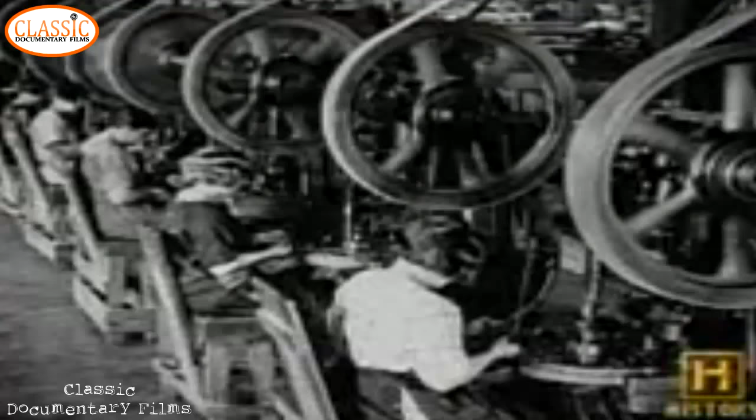Odorless and tasteless, this invisible killer has taken over 300,000 lives in the last century and is estimated to take 150,000 more between now and 2030.